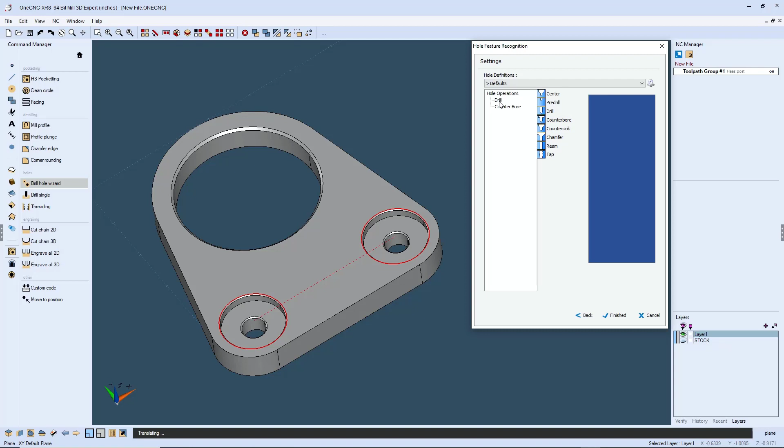And for this, let's just use a 1/2 inch drill, and that's going to be in turret position number 1. And machine cycle, absolute, Z-0.8 for the final Z depth. We'll click next on that. G83 with a peck depth of 150 thousandths, and we'll click finish.

For counterbore, I'm going to double click that, and notice that it still says drilling cycle up here, but you can still use an end mill. Just where it says tool type, make sure you select end. I'm going to have this in turret position number 2. This is going to be a 1/2 inch diameter end mill. We'll click next on that.

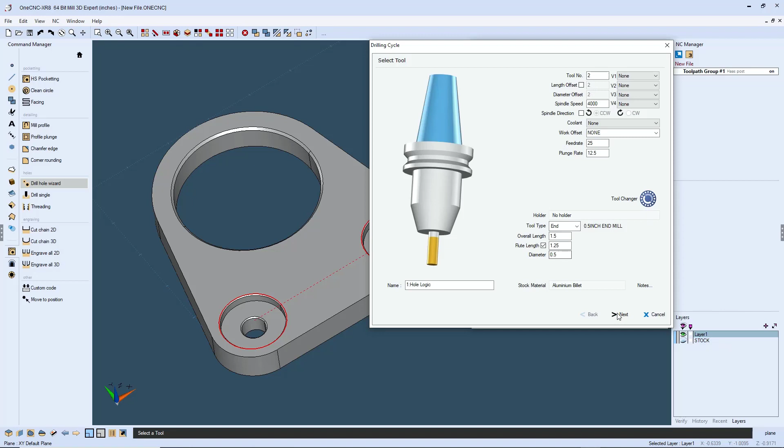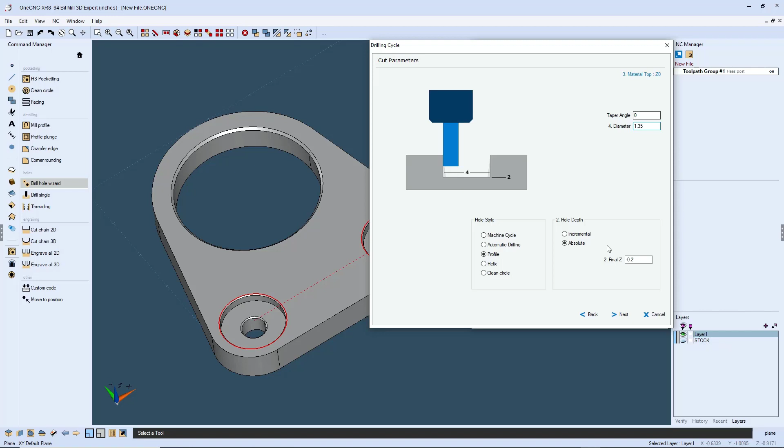So we're going to be performing a profile operation. So click profile, absolute. The final Z depth is going to be minus 200 thousandths for this. Now the diameter, that's the diameter of the hole. So I have kind of an odd value here. It's actually 1.350 inches. We'll click next on that. And we're going to plunge as the approach. We're going to climb cut.

But here's what's very unique about this. This particular profile operation is always going to take the tool and enter right at the center of the counterbore. Then it's going to arc on, climb cut all the way around, and then arc off. All right, so the key here is that this is always going to hit the very center of that counterbore, which means you could use the hole wizard anytime that you want to profile a circular pocket and you want the tool to enter right at the center.

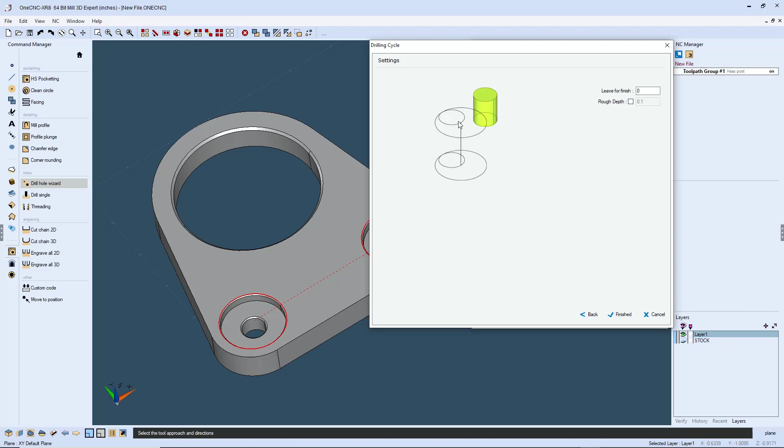I'm going to leave finish at 0. We'll click finish, and then now we can click finish to our hole operations. So I'll click finish. And there we go. All right, so let's simulate our toolpath and take a look at what we have. I'm going to right click and select simulate. So I'm going to use a solid model I created earlier for the stock. So we'll click OK. And here we go.

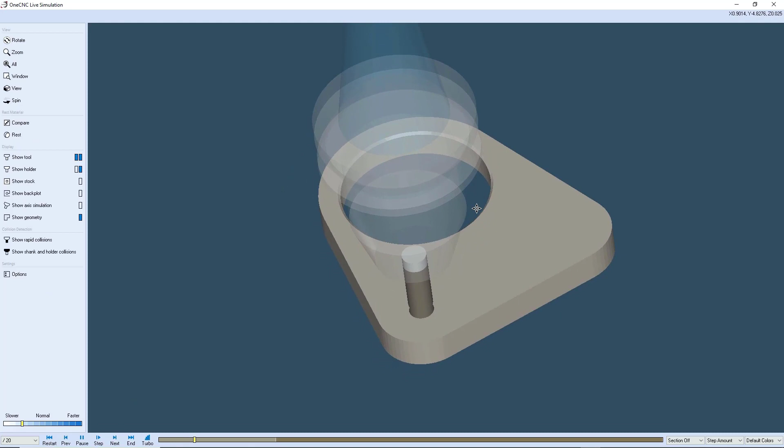So here's the drilling operation. But what's important is that the end mill is going to enter exactly where the drill has created the holes. So here we go. We're going to select the end mill. End mill is going to approach right inside where the hole's been drilled. Going to climb cut all the way around and arc off. So same over on the other side.

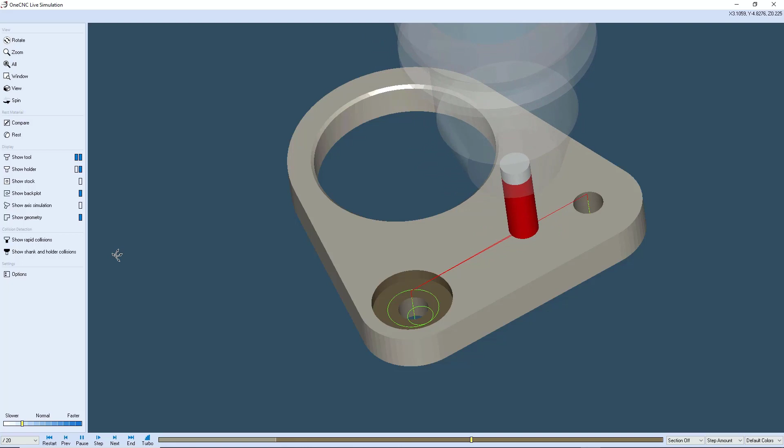End mill is going to approach, enter right on center line, arc on, climb cut all the way around, and then arc off. All right, so you can use this anytime you want to take an end mill and approach center on a circular pocket and perform a profile operation.